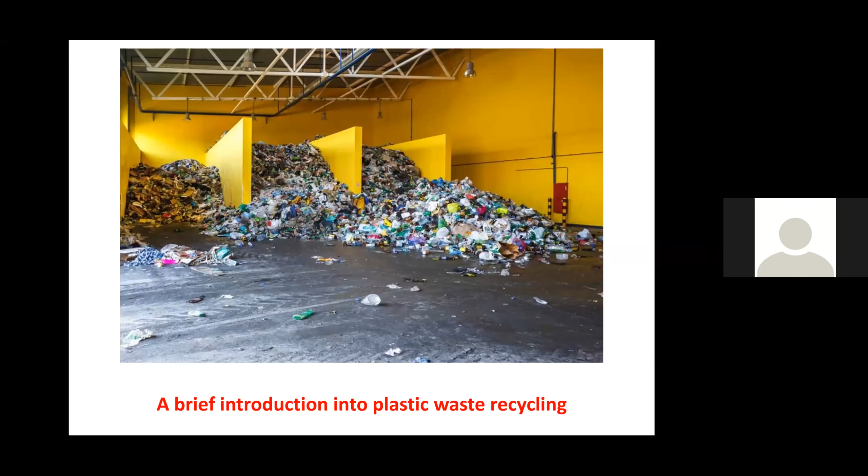Anyway, what I'm doing here first is a brief introduction into plastic waste recycling. But anyway, let's just get right into it.

Looking at the fate of all plastics from the 1950s onwards, the take-home message is that only around 9% of the global plastic waste was recycled. 12% was incinerated and nearly 80% accumulated in landfills or the natural environment. So there is massive scope to increase recycling.

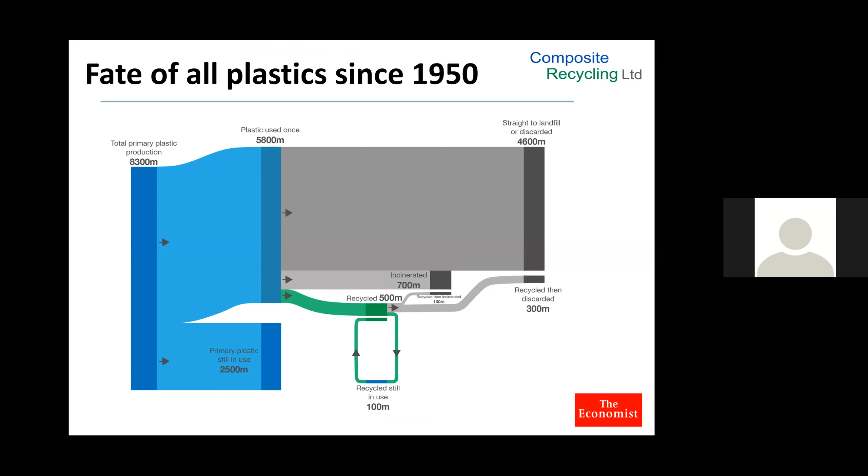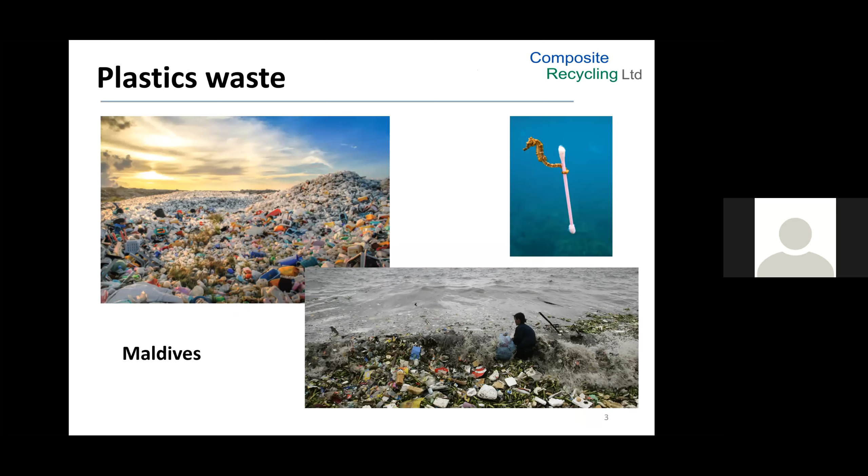Pictures just as these or worse of plastic pollution you may have seen, and you may have also heard of plastic pollution, which is also not good for anybody. So we do need to come up with solutions.

Very often Europe presents itself as a leader in recycling of plastics, but it depends a bit what you count as recycling. In 2014, for instance, export of plastic waste to Asia, mostly China, counted as recycling, although in practice this was often not the case. This Chinese recycling route was suddenly closed in December 2017 when China banned the import of plastic waste.

Moreover, we cannot legally export these wastes anymore. In May 2019, the EU, with most other countries in the world, the US being a notable exception to that rule, signed a treaty which classifies plastic waste as hazardous. Now, this greatly reduces the legal export of plastic waste to other countries and hence requires treatment at home.

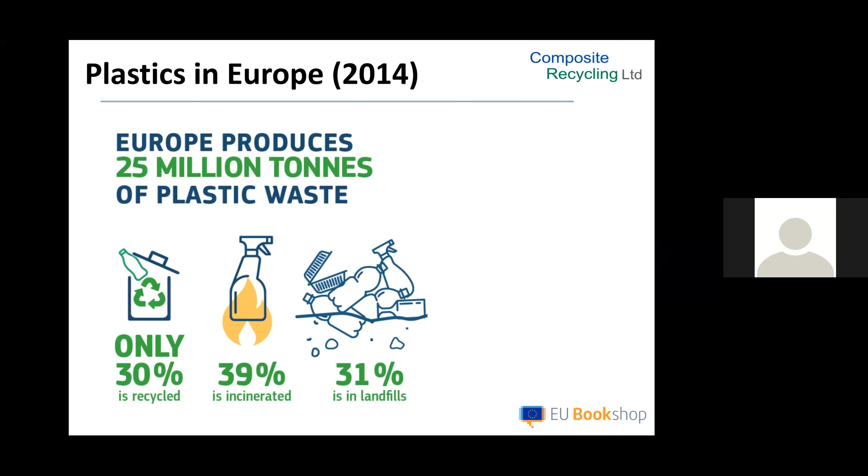And the receiving states have also realized that they don't actually want this waste either, as these plastics are often not recyclable, being contaminated with other wastes. For instance, in 2019, Malaysia sent back a number of waste containers. And this, as shown on this slide, is just one example.

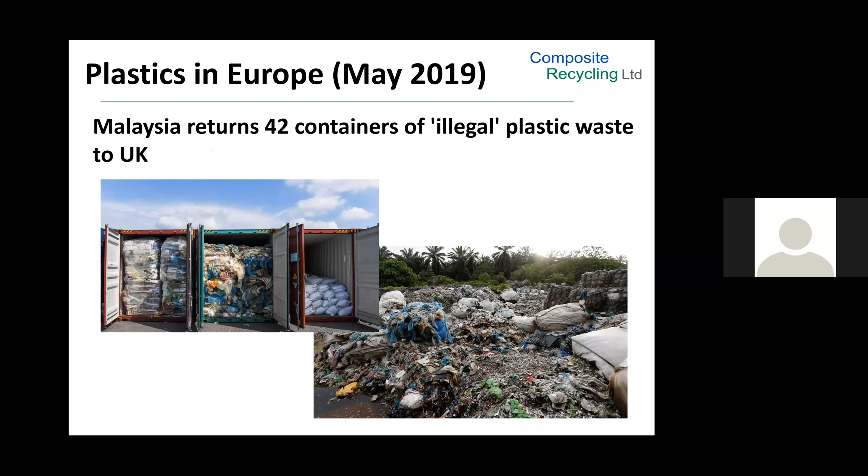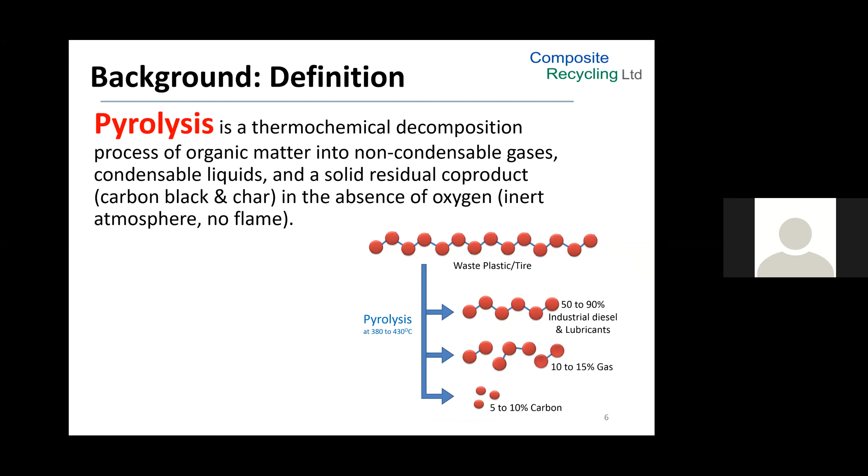So what can we do with plastic waste if we don't want to landfill it? Incineration is always an option. At least it gets the heat back. Another option is to pyrolyze the plastic waste and turn it back into oil. At a temperature of 450 degrees Celsius, polypropylene, for instance, converts into waxes, a small amount of oil, gases such as methane, propane, etc., and carbon, as shown here.

The chemistry of plastic pyrolysis is well established. There are thousands of papers stating more or less the same. There are quite a number of plastics and they all behave differently when pyrolyzed. Again, taking polypropylene, PP, the chemistry is not as random as one might think. The temperature has a major influence, controlling the amount of waxes, oil and gases as shown in the table here.

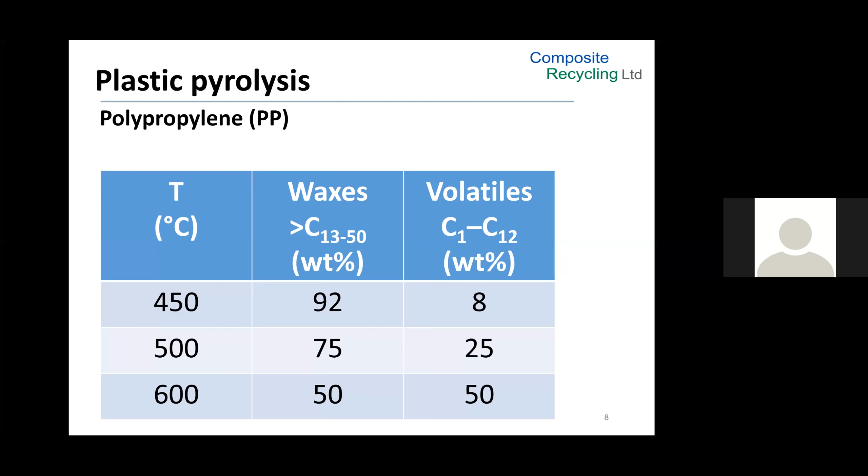In general, the higher the pyrolysis temperature, the lower the amount of waxes or oil, and the higher the amount of gases such as methane, propane, etc. I need to introduce two more terms. They are direct and indirect heating.

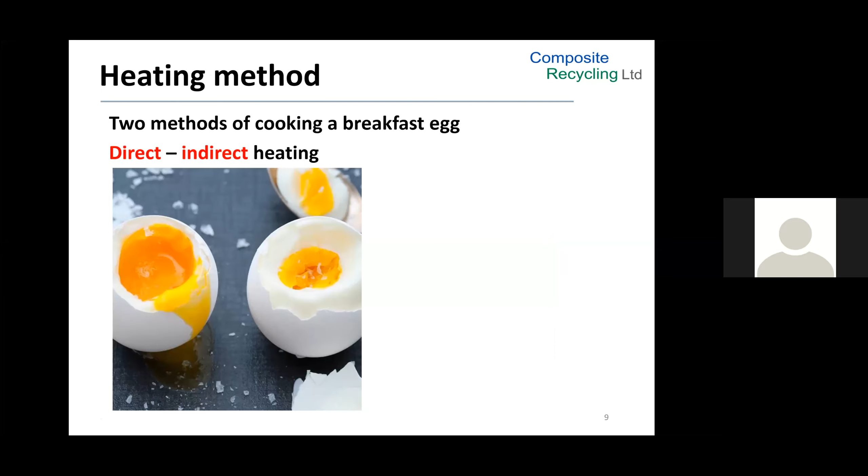There are two methods of cooking a breakfast egg. Method one, shown here, is what we all do. This is called direct heat transfer. That is, the material is in intimate contact with the heat transfer medium. In this case, it's boiling water.

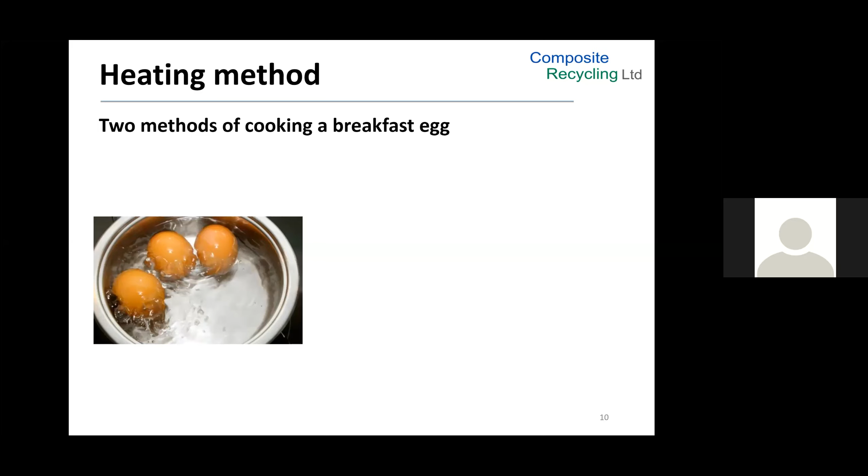Method two is virtually what everybody does in pyrolysis. This method places the egg onto a hot plate and waits for it to cook. This is called indirect heat transfer. Of course, you can improve things by turning the egg.

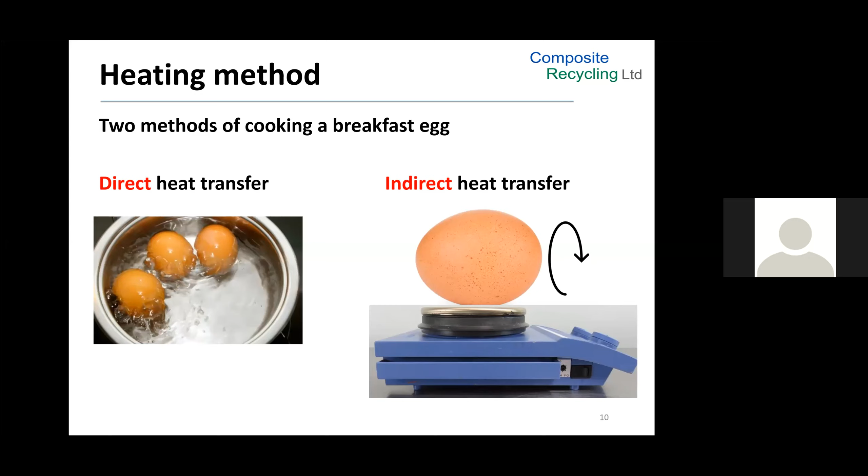Another word for such a process is rotary kiln reactor. Such reactors heat from the sides and the heat has difficulty getting in. The result is long residence times, temperature variations within the kiln, and secondary reactions such as cracking. So quite a number of things work against you when recycling plastic wastes in rotary kilns.

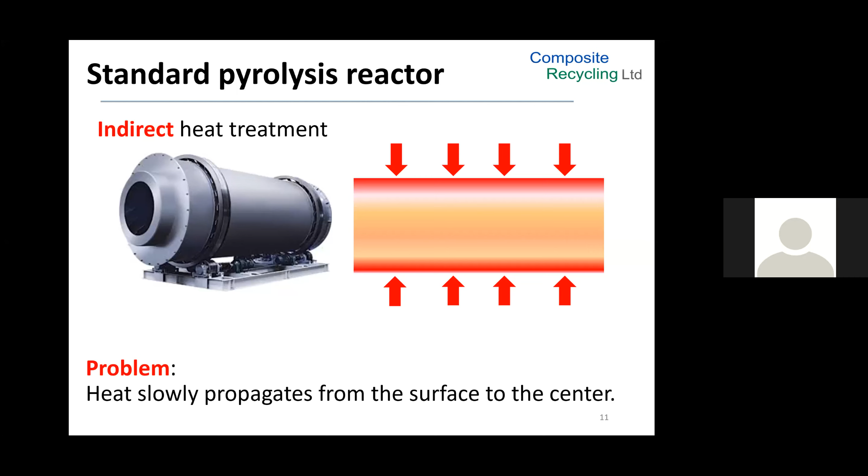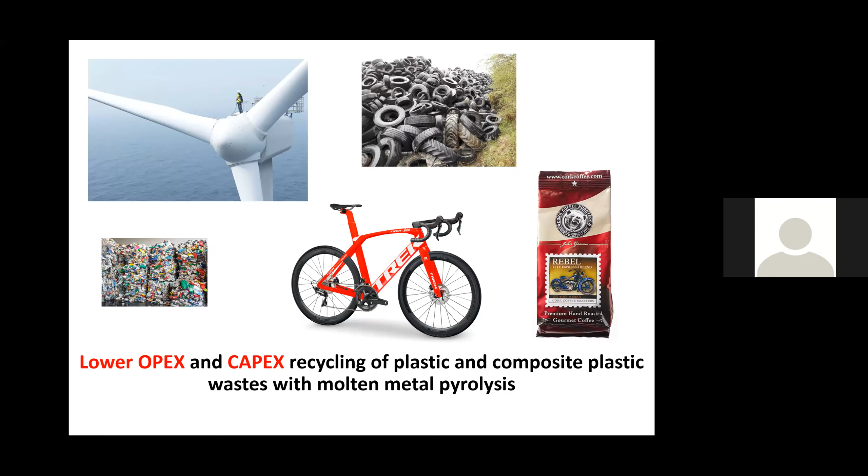All right, now moving quickly on to my company. In an earlier talk, I have already explained how we recycle tires, but we can do more. Here, I am going to show you how we recycle plastic wastes, especially mixed plastic wastes, and aluminium laminated plastics.

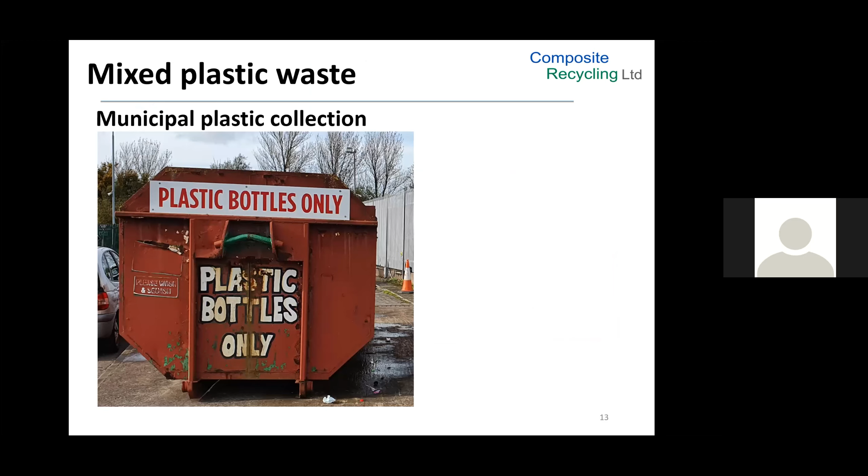Mixed plastic waste is a composite waste, and is therefore difficult to recycle. Mixed plastic waste is a composite waste as different plastics are mixed.

Ideally, this plastic stream should be remelted and reused. But there is a problem. Never mind that plastics can only be remelted 4 or 5 times, as every time remelting occurs, the plastic chain molecules get shorter. You can't remelt mixed plastic waste as the melting temperature of each plastic is different. But you could pyrolyze the whole lot.

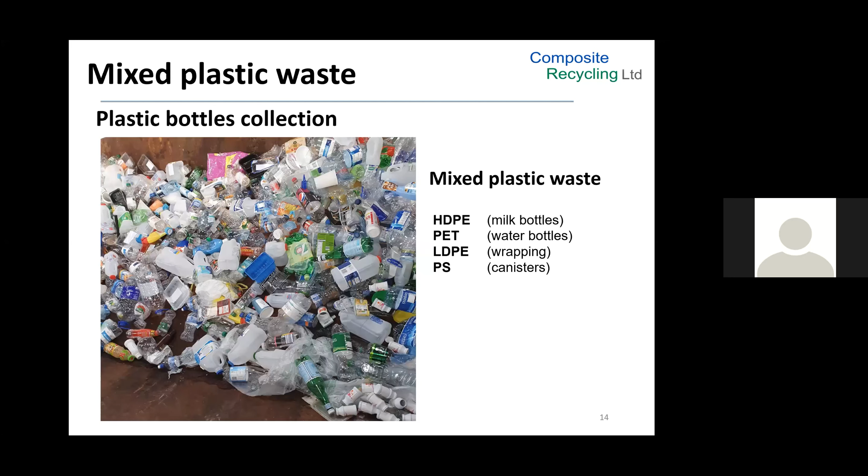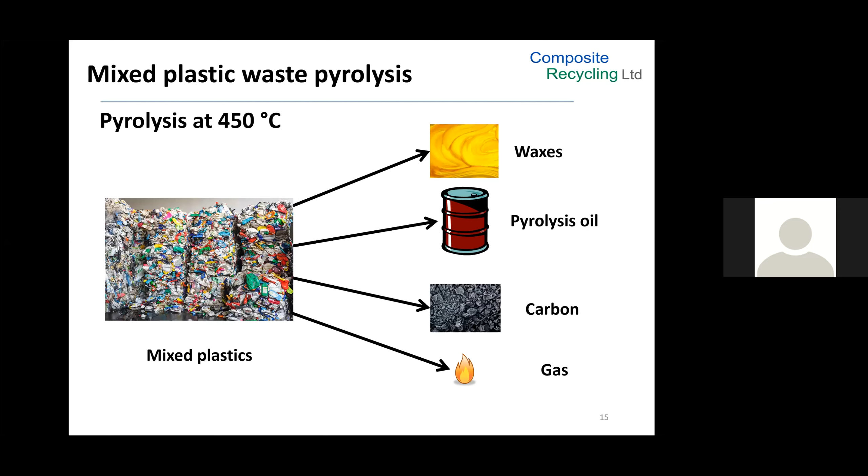Pyrolyzing mixed plastic waste results in different products. Nearly all of the polyethylene converts into waxes, while other plastics will convert to oil, waxes, gases, and carbon. But anyway, how would we do this in practice?

The waste plastics are added via an auger, for instance, to the pyrolysis chamber or onto the top of the molten metal where the material pyrolyzes. The vapors together with the solids are removed from the surface of the molten metal. The solids are separated and the gases are condensed to waxes and/or oil.

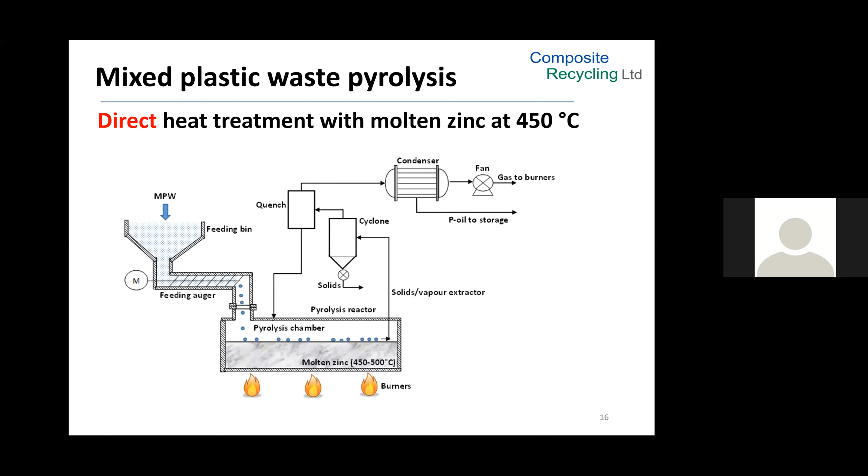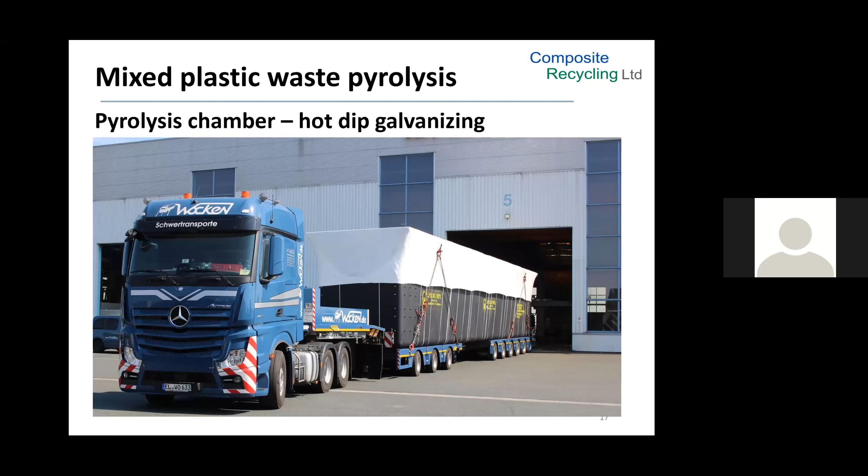The pyrolysis chamber itself is from the hot dip galvanizing industry and can indeed be very large as shown in this picture here. But this is where I want to get to.

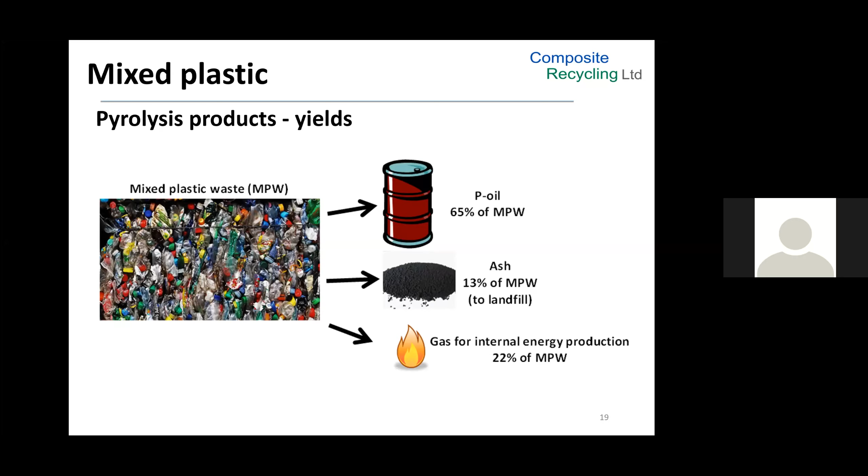These here are the yield assumptions. The pyrolysis oil yield was set as 65%, which is quite low. We could have set it at nearly 80%. And we know that our process has an extremely good performance in yield.

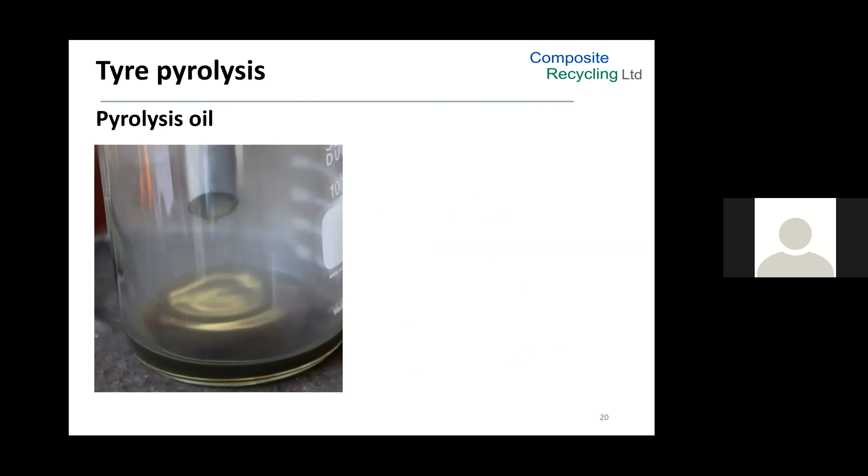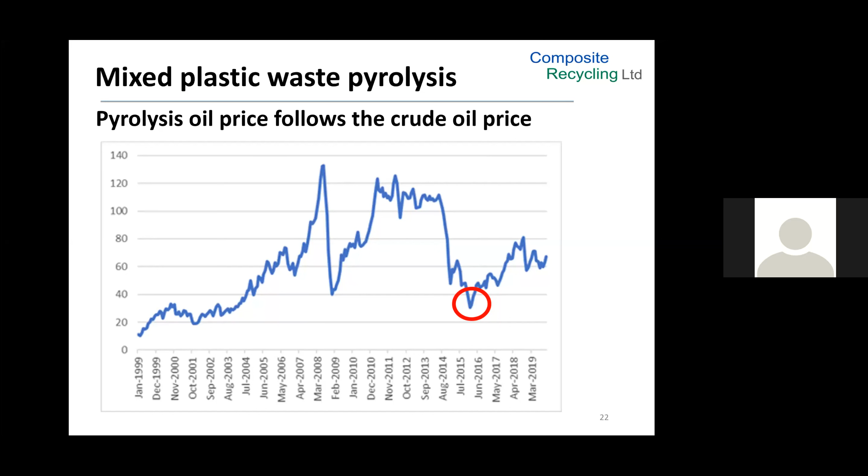We simply took the figure from February 2016 when the oil price was extremely low. That gave us a pyrolysis oil price of 210 euros a ton. This would be the revenue a plastic waste pyrolysis operator will achieve selling it to an oil refinery. This cost already includes the transport cost of getting it to the oil refinery. Waxes may actually achieve a higher price, but again, we just ignore this.

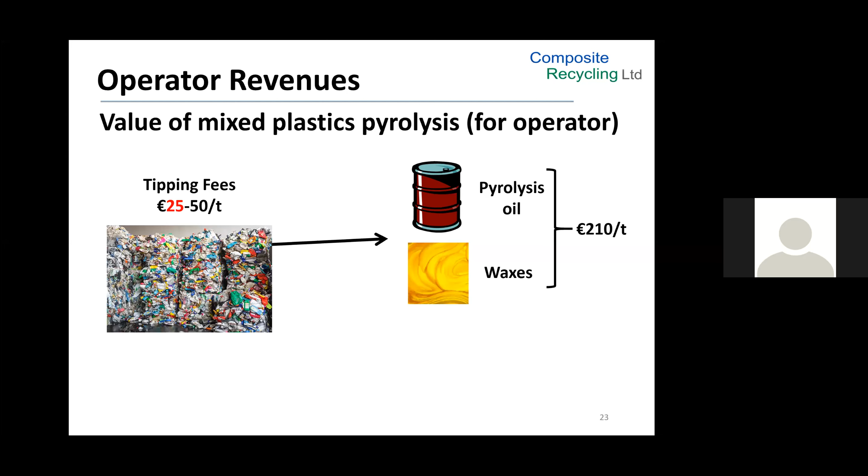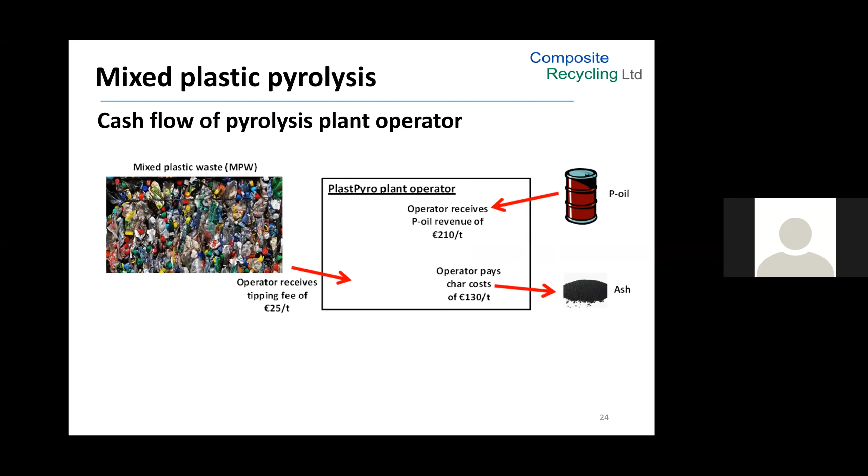There are also other costs, such as the building of the plant, insurance, personnel costs, electricity, and so forth. So you would have to estimate all that. Taking the cost of the facility as 26 million euros, allowing for finance cost, inflation, and operating costs of some 800,000 euros per year, the internal rate of return, or IRR, calculates to 21%. This is a very good figure, considering that incinerators have been built with returns of less than 7%.

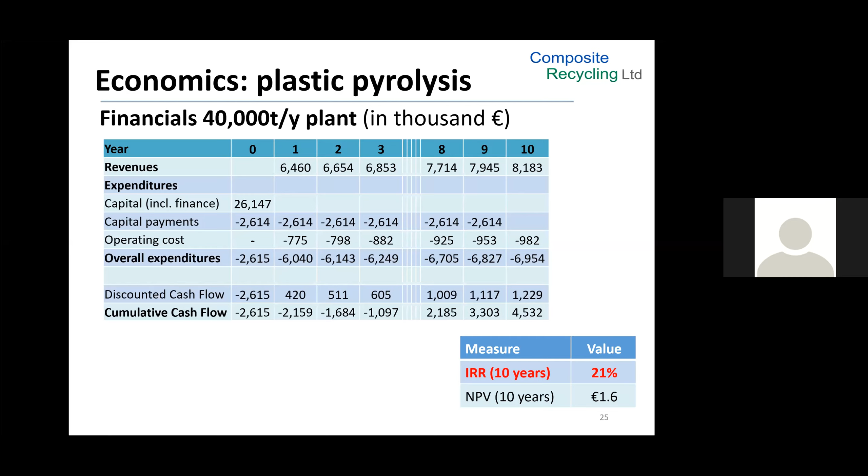The throughput of 40,000 tons a year sounds high, but actually it is not at all. In fact, in the US, for example, a competitor recently announced a planned 120,000 ton a year plastic pyrolysis plant. The financial returns, or the IRR, are sensitive to a number of factors. For instance, increasing the throughput of the plant to 50,000 tons a year increases the IRR to nearly 60%.

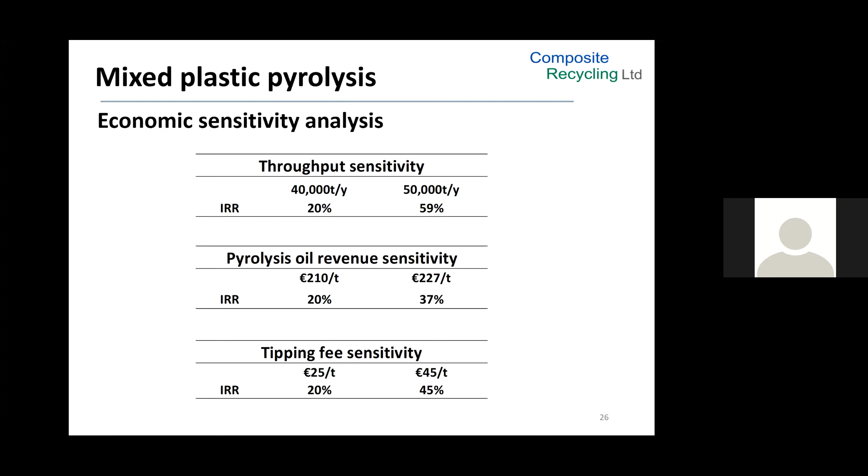Or getting an increased revenue for the oil increases the IRR also dramatically. Likewise, increasing the tipping fee from 25 euros to a more realistic 45 or 50, which is probably even better, increases the IRR to 45%. Now, on a worldwide basis, we believe that some 100 plants are needed. In other words, this is a very large market.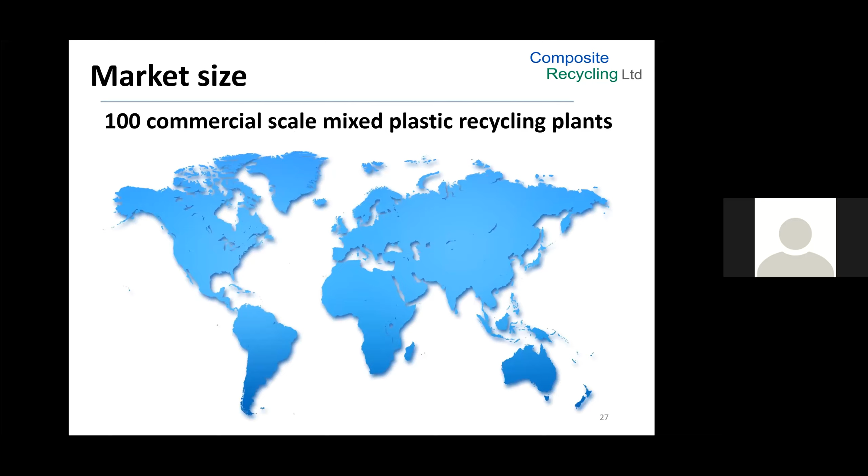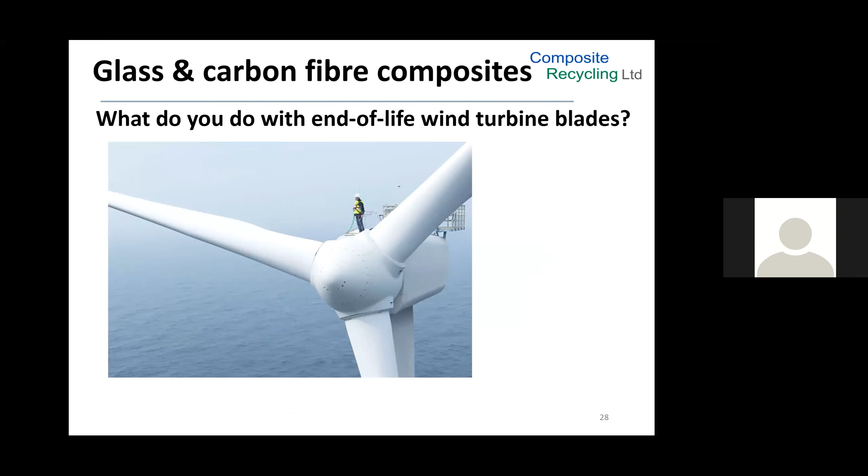Moving on to a more classic composite waste. Here, glass fiber wind turbine blades. These things, for instance, are not recycled. This is what happens to them. They are landfilled. Now, is this good or bad? Well, I don't really know.

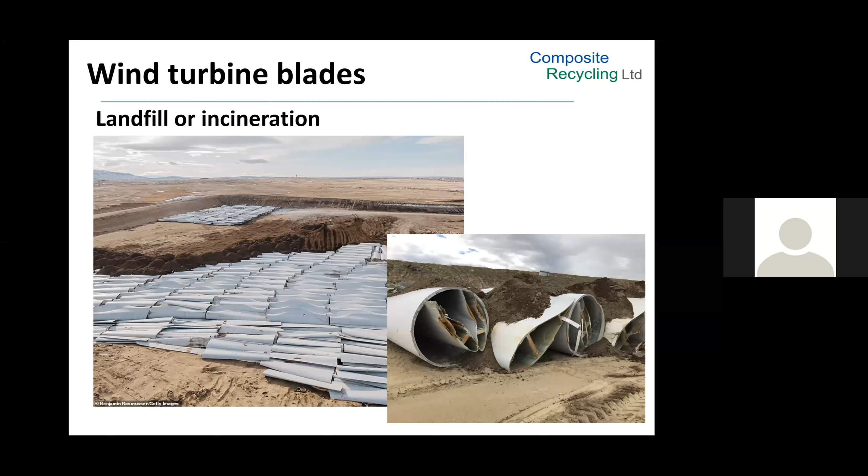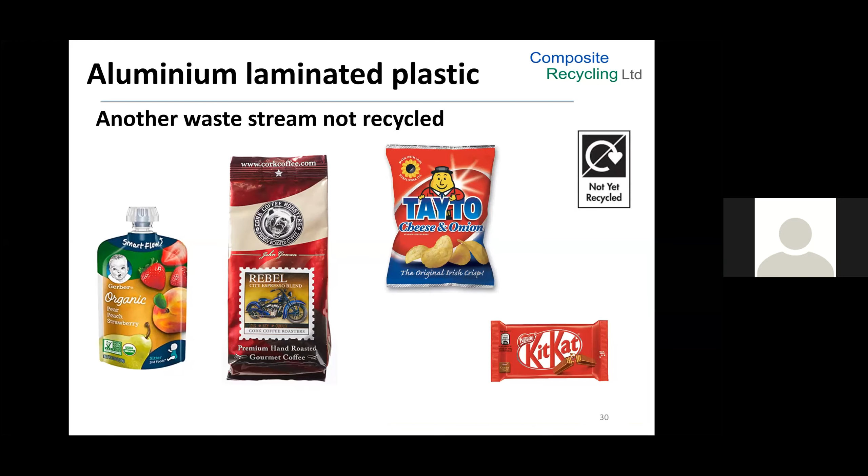This here is another waste stream that is not recycled. Aluminium laminated plastics, often used for coffee packaging and other foodstuffs, as shown here. Aluminium laminated plastic is an aluminium foil coated with plastic, typically polyethylene, on both sides. This is an excellent material for foodstuffs, but difficult to recycle.

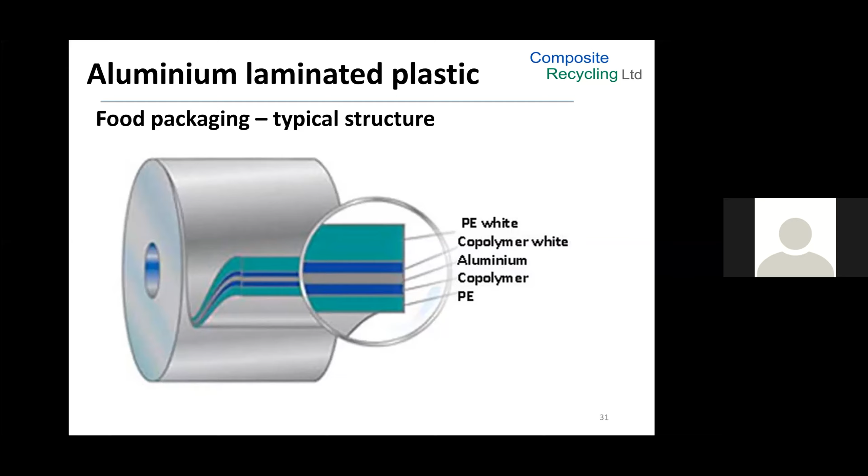It is possible to use hydrometallurgical methods, that would be acid or caustic, to dissolve the aluminium and somehow afterwards get it back. But clearly this is a very expensive solution. Pyrolysis appears to be a better solution. The following will happen at 450 degrees Celsius. Nearly all the polyethylene converts into waxes. Little oil, some gases and carbon, and then of course aluminium.

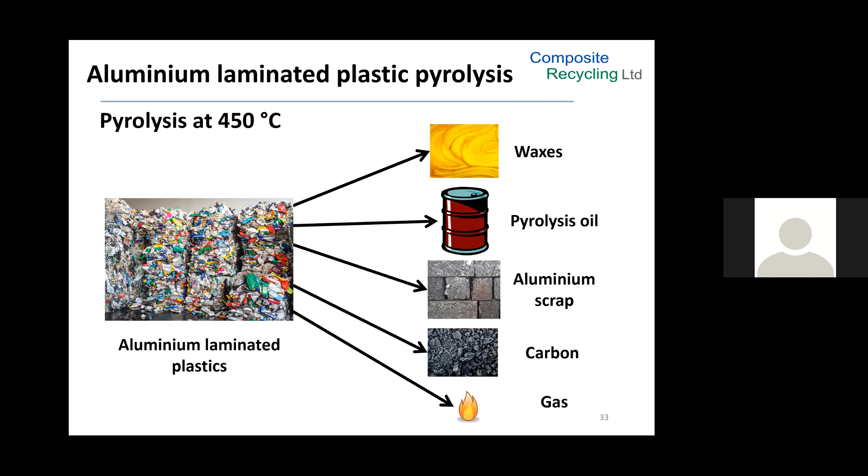For pyrolysis, there are three options. Microwave pyrolysis is offered by a number of startup companies. Well, to me, that sounds rather like an expensive way of recycling a waste stream, using high tech to treat a low cost waste stream.

Option B then would be the rotary kiln. Pyral, for instance, operates a pyrolysis plant, a rotary kiln in Germany. So therefore, this waste can be loaded into a kiln, processed and unloaded from it.

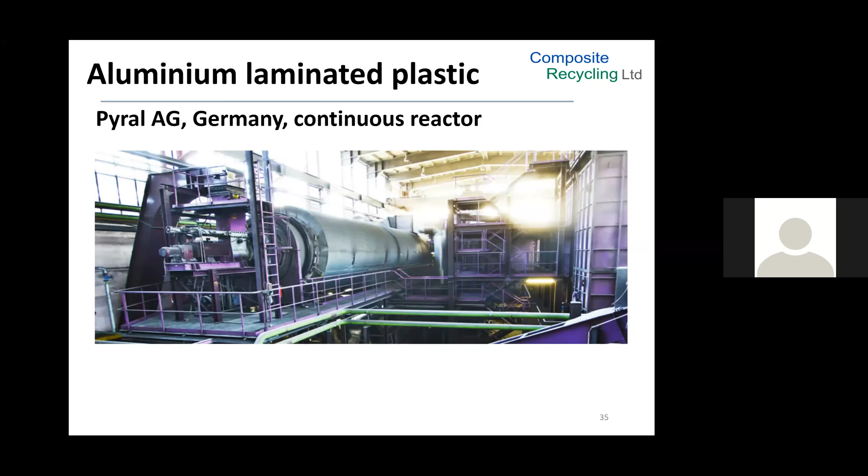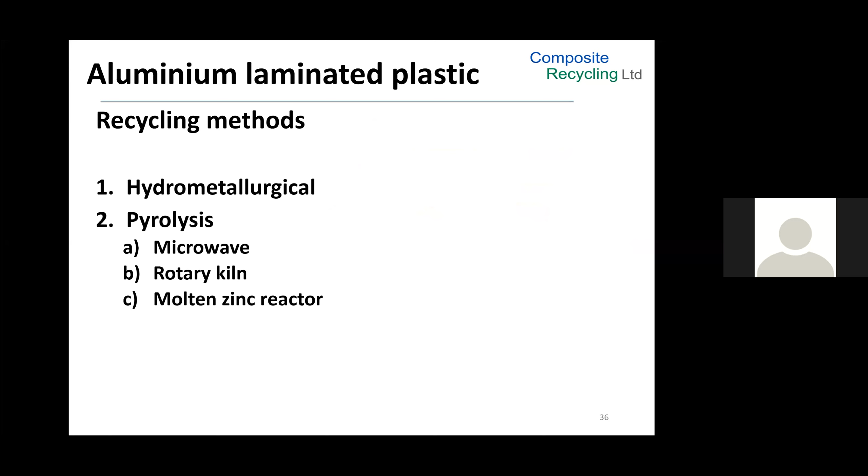This waste stream could also be treated in our molten zinc reactor rather than with a rotary kiln. But there is a problem. The economics of aluminium laminate recycling do not work out. And the technology used for recycling the waste is irrelevant for this problem statement. The problem is that economies of scale are not available. You simply cannot get enough aluminium laminate plastics into one spot.

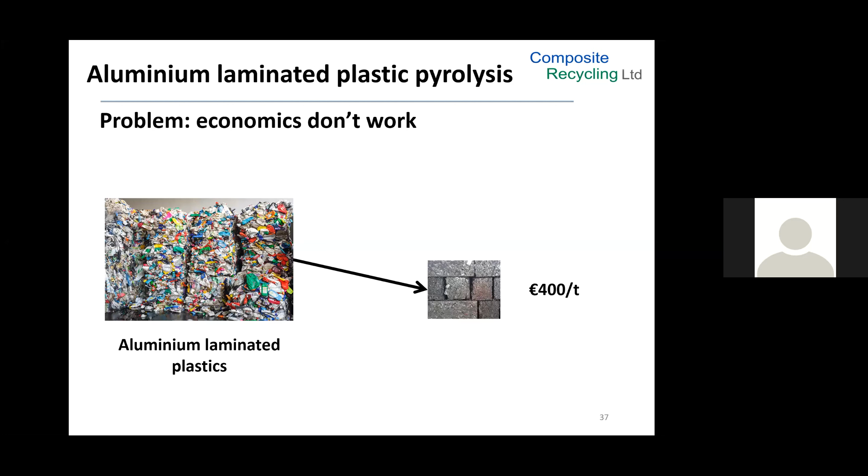Luckily, there is help at hand. To make the economics work, the tipping fee has to be increased. This is what's called extended user responsibility. In essence, the producer of the product pays the recycler a fee to recycle these goods. From a waste recycler point of view, this may actually be a good thing, as this fee is not subject to market fluctuations like the oil price is, and therefore it is a steady source of income.

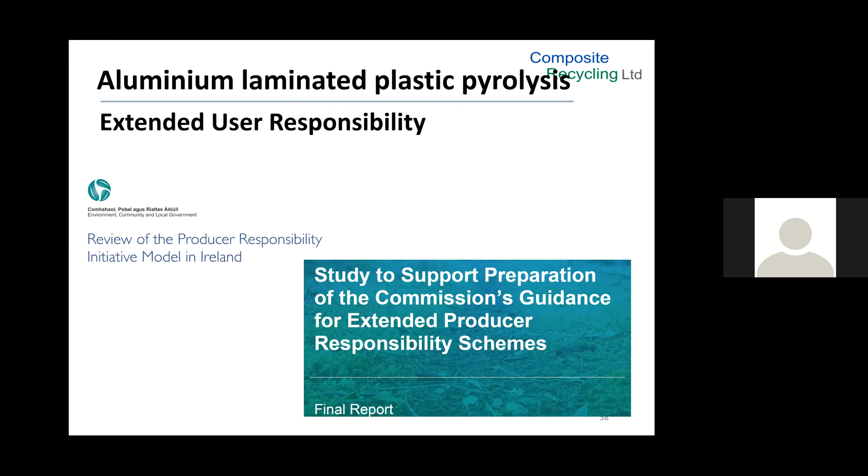Now, the Irish case is interesting and very tricky at the same time. Ireland's population is small compared to other states, and as a result, the waste volumes are low, making economies of scale even more difficult. Moreover, shipping costs across seas may be prohibitive. So, in nearly every case, extended user responsibility may have to come into play.

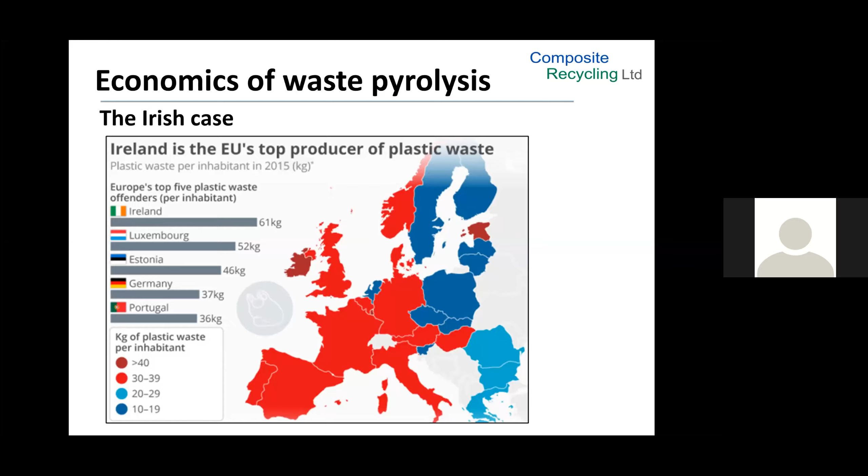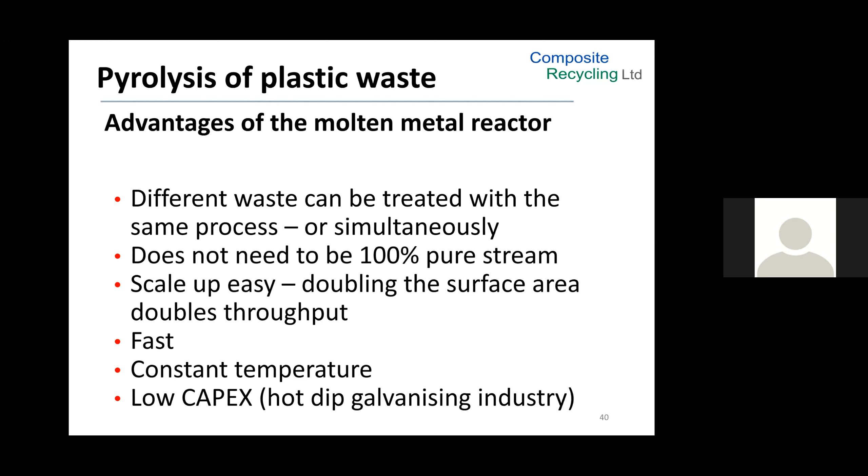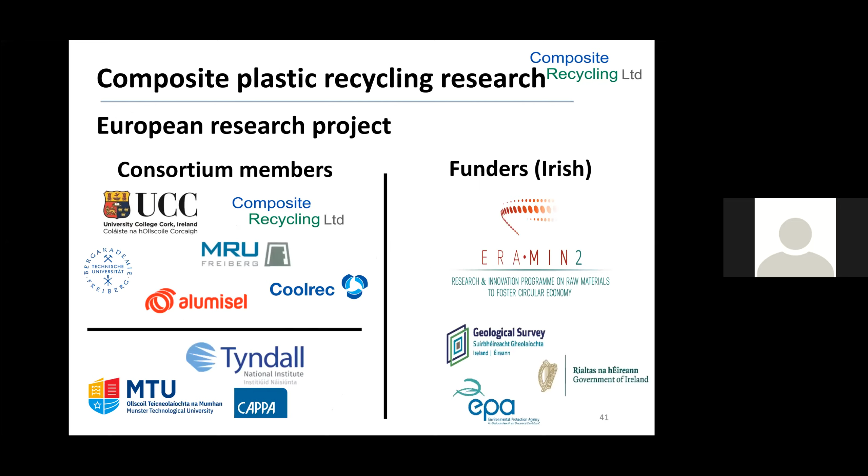Currently, we are part of a European research project into the recycling of composite wastes. These research projects tend to be large with many members and subcontractors as shown here. Over the next couple of months, we will be announcing new ways of how to recycle many composite plastics, such as the ones listed here. So, well, stay tuned, so to speak.

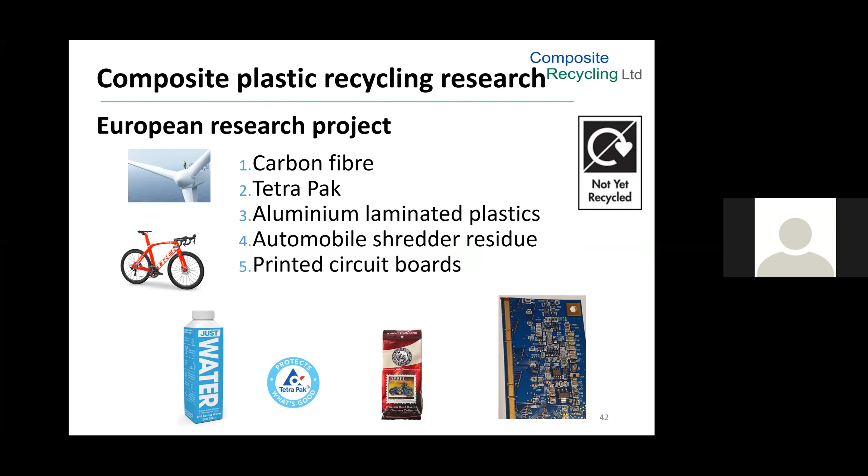The next step in the development of the technology is the demonstrator scale, just prior to commercialization. So yes, we are looking for funding.

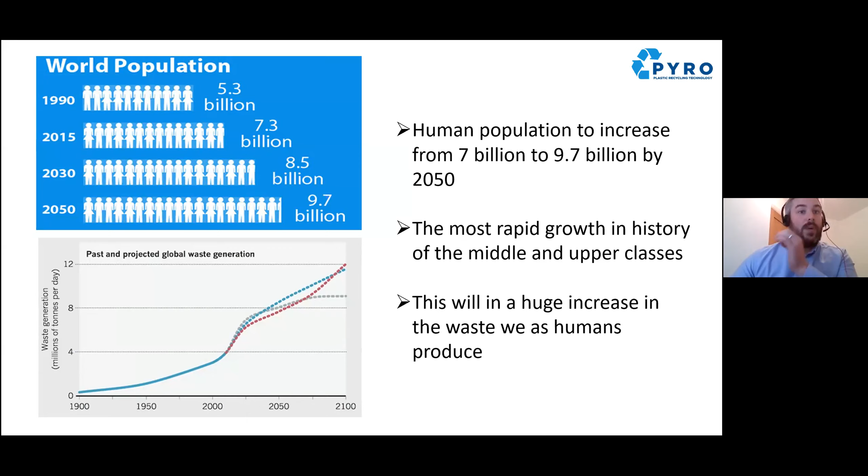It is not commonly known that waste is a huge contributor to global warming, with 1 ton of rubbish emitting 6.2 tons of carbon dioxide equivalent in the form of methane to the atmosphere. With the huge increase in demand for resources and the harmful effects of waste we as humans produce, it is now more important than ever for us to move away from our current consumption model of take, make, and dispose to a circular economy where we will continue to reuse resources by recycling.

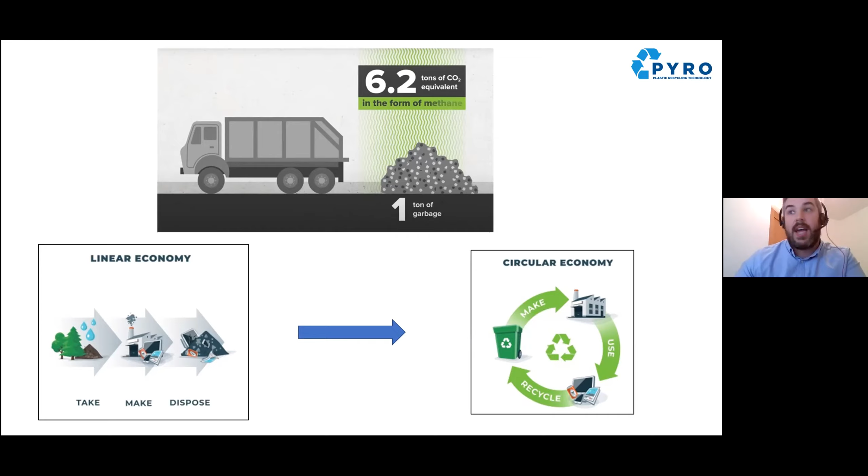This problem of what to do with all this waste has led many people to ask simply why we do not just burn or incinerate our waste and use it to produce electricity. Although this may seem like a simple solution and reduce the fossil fuel consumption for energy production, it has serious long-term effects as it produces numerous harmful emissions and a very toxic ash, and unfortunately is extremely energy inefficient. So what is the solution? Pyrolysis, or chemical recycling, as it is sometimes referred to. Unlike incineration, there are no harmful or toxic ashes, and also there are no harmful emissions like dioxins or furans.

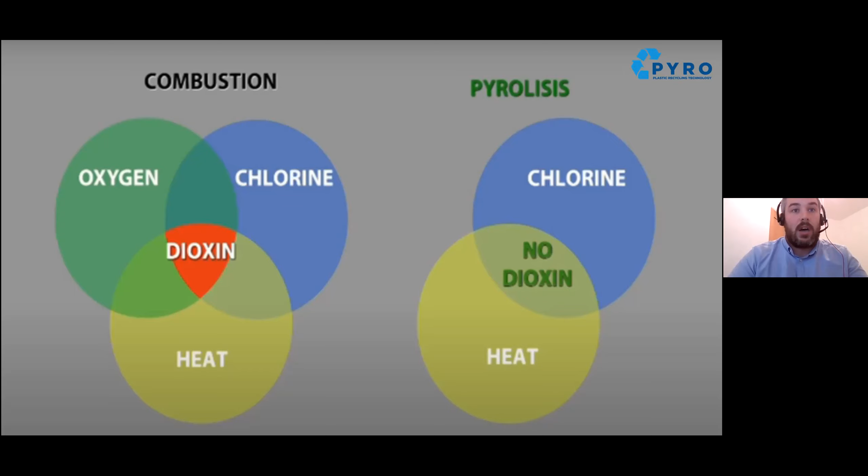This is for the simple reason, as Frank explained, pyrolysis, unlike combustion or incineration, there is no oxygen present, and, as the name implies, dioxins contain oxygen molecules. As a general rule, oxygen-containing emissions are the most harmful to human health because we as humans absorb oxygen through our blood to breathe.

A point I have to make tonight is that, as many of you may have heard over the Christmas period, two peat-powered electricity generation stations have closed at Shannonbridge in Offaly and Lanesborough in County Longford. These two relatively new power plants, costing in the region of €250 million each, are a huge waste of taxpayers' money, and more importantly, will destroy their rural communities.

Although we think of peat as being a very Irish resource, this is not the case, and it is very common in Scandinavian countries. These Scandinavian countries, who also had to reduce the burning of peat to meet their carbon emissions, instead of taking the easy way out and just shutting them down, decided to turn to the technologies of gasification and pyrolysis, installing these plants next to their old peat-powered stations, which convert waste into a clean gas that fueled their power plant, thus stopping the closure of the plant, saving jobs and taxpayers' money, and more importantly, stopping the burning of peat and coal and reducing their CO2 emissions.

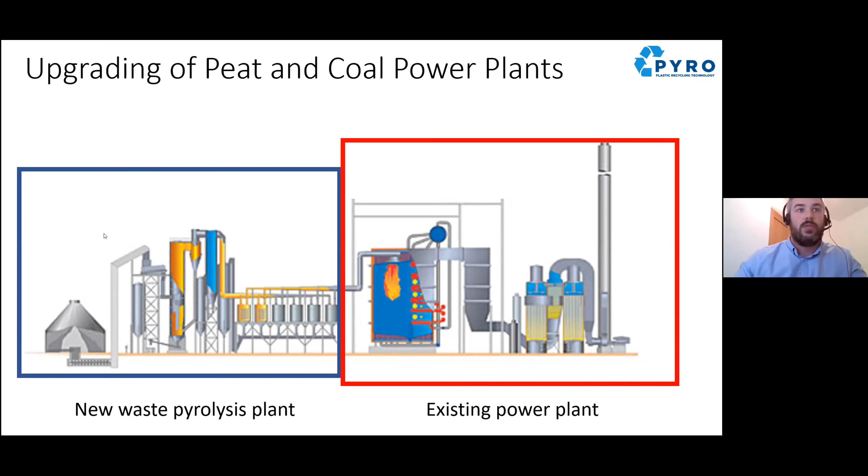As we can see here, sorry, apologies. Here is a picture of the power plant. As we can see, the new waste to gas plant tying into the existing power plant.

Converting waste into energy using pyrolysis, although an extremely useful technology, can be put to far greater use other than producing electricity. It can be used to create highly valuable oils, chemicals, and other fuels, which has the ability to solve some of the main blind spots highlighted by the international energy agencies, which are petrochemicals, long-haul trucks and lorries, and the manufacture of materials like steel and plastic.

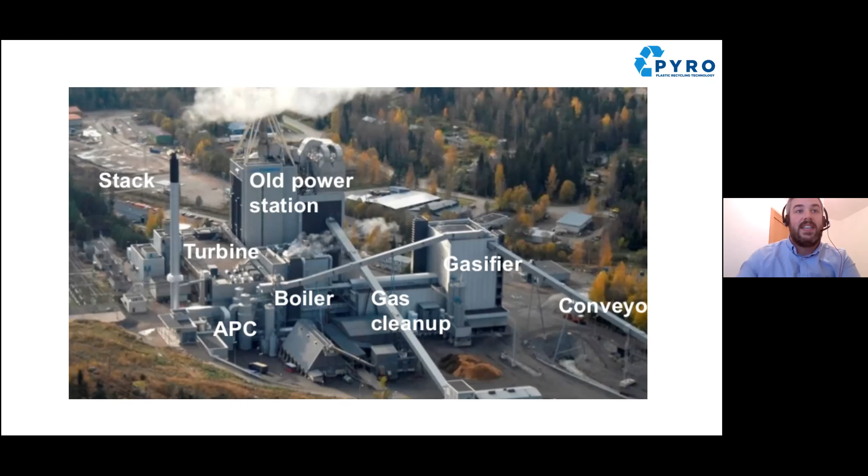Of all the materials that we can process by pyrolysis, plastic is by far the most lucrative and readily available, and as we are all well aware, is the most pressing environmental issue of our generation. The biggest growth of any type of human waste by type will be plastic. By 2050, plastic production is set to quadruple, and there will be more plastic in our oceans than fish.

I will draw your attention to the plastic share of global oil consumption, which will be increasing from 6% to 20%, and its share of the carbon budget will increase from 1 to 15%. We will later discuss how pyrolysis can drastically reduce both of these.

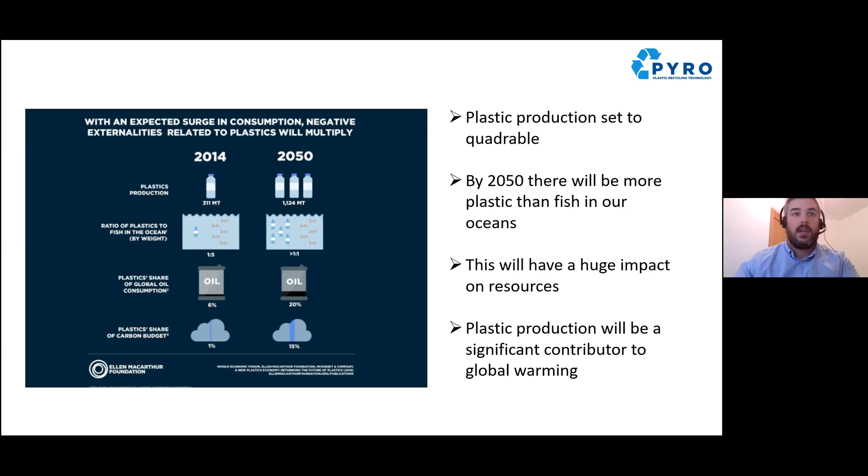I'm not going to go into detail in this lecture about the current plastic crisis, as it has been well publicized, and I want to spend the rest of this presentation discussing the only, and I mean the only, solution to the plastic waste crisis, which is the pyrolysis of plastic waste, or chemical recycling, as it is sometimes referred to. I am calling this a plastic waste crisis because we do not have a plastic crisis, we have a plastic waste crisis.

The reason I say this is because plastic is one of the most critical materials in the fight against climate change. It reduces food waste, reduces the weight of cars and planes, thus reducing fuel consumption and making electric vehicles possible. Most materials, when compared to plastic, have a far higher CO2 equivalent when viewed over the life cycle of the product. This is because of how light plastic is per unit strength, thus requiring less of it and making it lighter to transport.

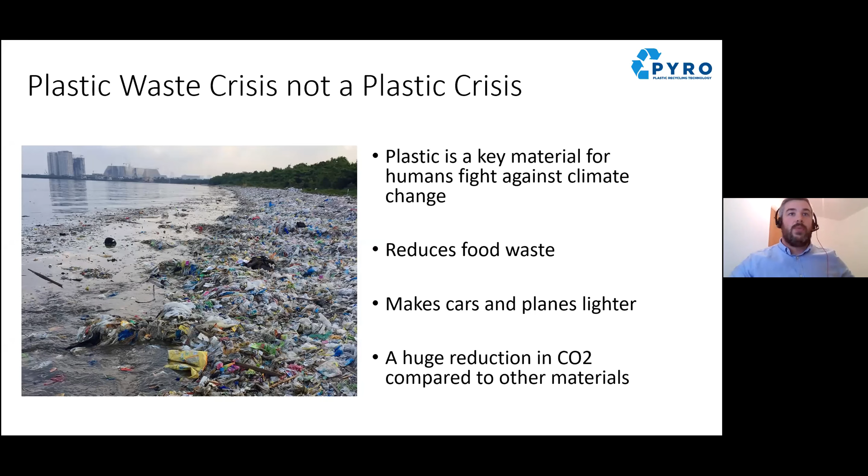The issue we have is that we have not found a way to recycle plastic efficiently, the same way we have other materials like glass and aluminium. The reason for this: although there are only 7 resin codes, there are actually thousands of different types of plastic. Different combinations of dyes and additives can be added to the basic resin to produce a desired color, shape, and texture in the final product. These variations in manufacturing process lead to different melting points and other properties within the same resin code.

So in order to mechanically recycle plastic, it has to be separated into the correct type, color, production method, and be relatively clean and of good quality. And this all has to be done while waste companies are trying to make a profit. Along with this, every time plastic is mechanically recycled, its quality degrades. This is the reason 80% of plastic that has been recycled once ends up in landfill or incineration.

In most communities, only bottles with necks marked with resin codes 1 or 2, which are soda bottles and milk jugs, are recycled. Containers without necks, such as tubs and trays, and plastic films, are not easily recyclable.

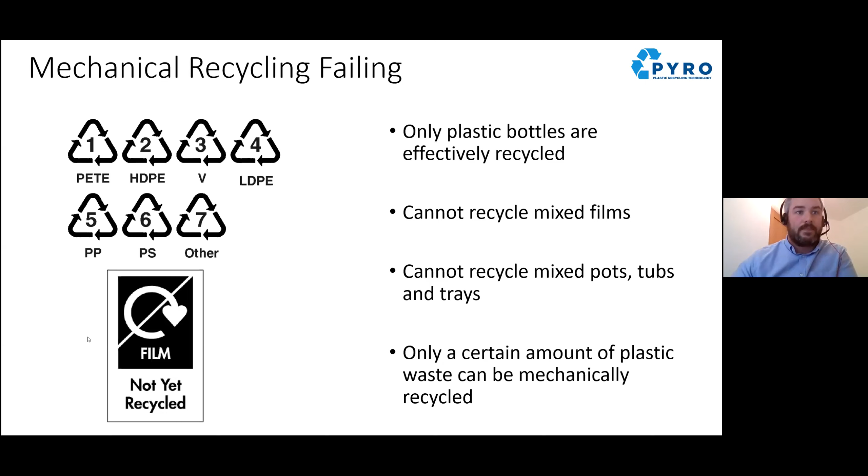So a way to recycle mixed type, mixed color, with additives, dirty and poor quality plastic, where it can be recycled infinitely without its quality degrading, and most importantly, making it profitable. The only technology that can do this is plastic pyrolysis.

I just also want to make the point that plastic pyrolysis will not take good quality plastic waste destined for mechanical recycling. As Frank said earlier, we will have to pay for this feedstock versus getting paid a gate fee by waste companies to accept this previously unrecycled plastic waste, as they are trying to avoid high landfill and incineration costs. A facility to recycle this unrecyclable plastic, like plastic films, is badly needed for waste companies who want to avoid the high costs associated with landfill and incineration.

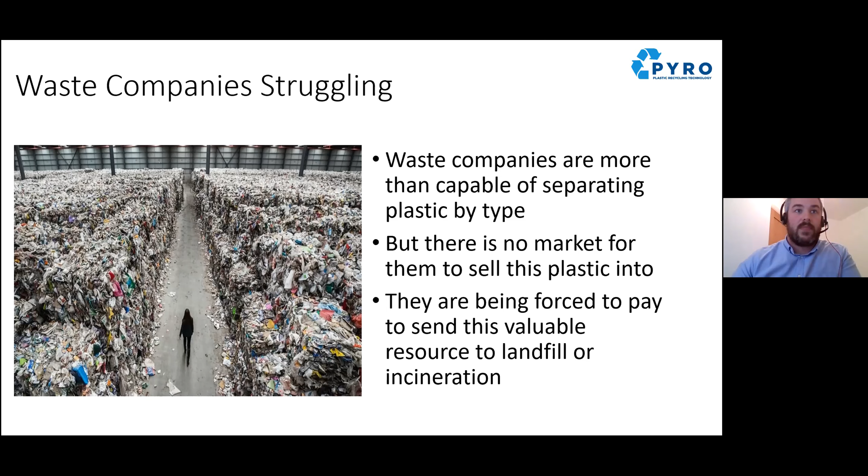A point I would like everyone to leave with today is that biodegradable plastics are not the answer to the plastic crisis, and in fact are making the crisis worse. If anything, we should be reducing the types of plastic that we use. As I said earlier, if you throw biodegradable plastic into your general waste bin and it ends up in the landfill or into the environment or in the ocean, it will behave the exact same as any other type of plastic and will take just as long to degrade.

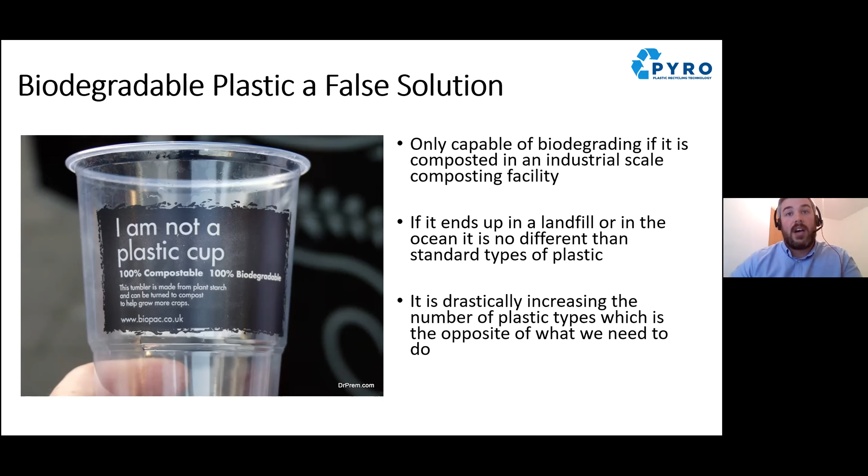Only industrial composting facilities, not your compost bin at home, can degrade this plastic as high temperatures are needed. What is worse is that very few of these industrial composting facilities accept large quantities of this plastic waste. If a biodegradable plastic ends up going to incineration, which is very possible, it will break back down into what it was formed by, which with bioplastics is often acids, which obviously is a very bad pollutant.

This accounted for 5% of the world's cropland being changed from food to biofuel production. This was a key factor that caused the world food supply to dip below world food demand in 2008, which resulted in food riots across the world and countless deaths due to malnutrition. This madness was thankfully reduced, but unfortunately, traders who are seeking higher profits are now eyeing up the bioplastics market to once again take food that should be used to feed people to produce these bioplastics.

This is causing rainforests to be cleared to make way for palm oil, to produce compostable plastics, to make us in the West not feel guilty about our disposable coffee lids. And with 1 billion people going to bed hungry tonight, this is, in my opinion, close to a crime against humanity.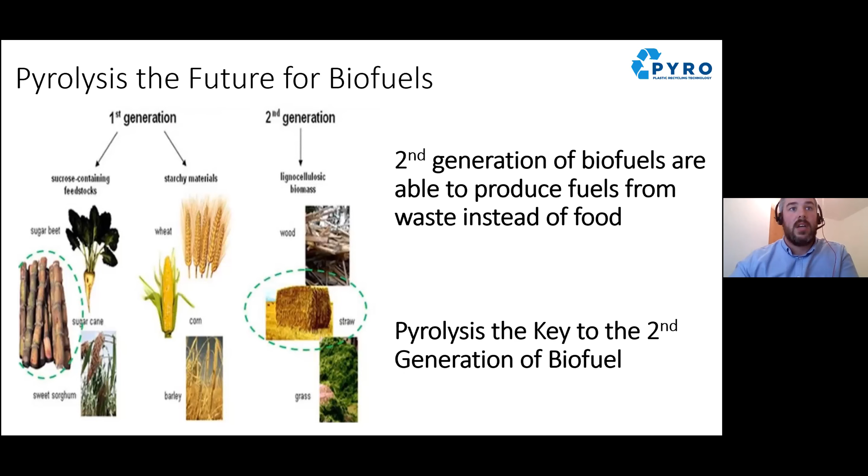Polyolefinic plastic, which is low-density polyethylene, polypropylene, and high-density polyethylene, accounts for 60 to 70% of the world's plastic, and more importantly, is the hardest plastic to recycle, used in the production of plastic films and pots, tubs, and trays. With this plastic, it is very possible to produce the highest quality chemicals and oils, which can be used to make virgin quality plastics by great companies like BASF.

The solution to the waste plastic crisis and to get recycling rates above 95% is to turn previously unrecycled plastics not back into plastics, but into its feedstock, oil. This oil can be used to produce virgin quality plastics. This will drastically reduce the CO2 footprint of plastic production.

Combined with this, the third generation of plastic pyrolysis plants, which hopefully our company will start designing in the next 3 years, will reduce carbon dioxide emissions by around 65% by converting plastic into its original monomers. I will not go into this today due to time constraints, but it is clear to see the potential that plastic pyrolysis has.

The development of this industry will give waste plastic a value similar to aluminium cans. This will create a natural industry for the collection of plastic in countries without developed waste infrastructures, and will give employment to the world's poorest and where it is most needed.

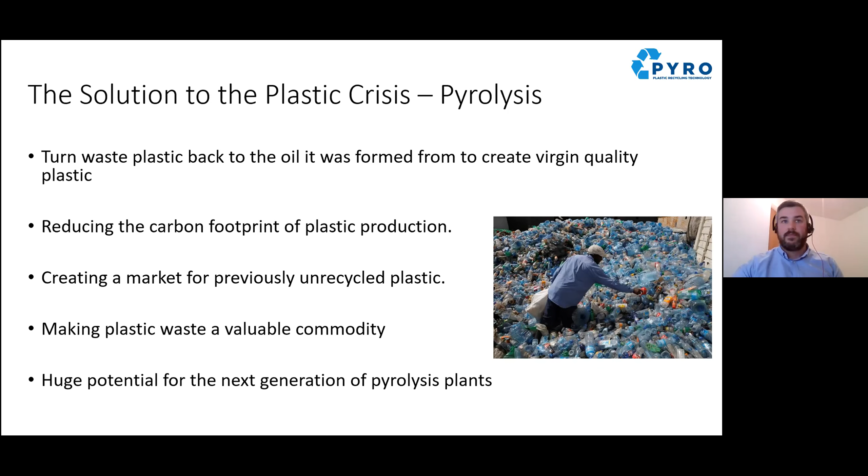The global outrage about the plastic waste crisis has driven consumer brands like Nestle, Pepsi, and Unilever, who are aiming for 100, 33, and 25% respectively of their materials to be produced from recycled content by 2025. Coca-Cola are aiming for 50% recycled content by 2030.

How, you might ask, are Nestle going to achieve 100% recycled content by 2025 while requiring food-grade quality plastic? You guessed it, by investing in their very own plastic pyrolysis plants. The EU has also doubled the plastic recycling rate from 22.5% to 50% by 2025. Countries like Ireland are going to find it hard to hit this target without investing in plastic pyrolysis plants.

In turn, this demand has placed huge pressure on petrochemical companies to produce plastic from oil derived from waste plastic, which has led to a €300 per tonne premium on pyrolysis oil over oils derived from fossil fuel sources. This is a phenomenal premium, which is creating a gold rush in the plastics pyrolysis industry.

This has led to companies setting up, buying old first-generation pyrolysis plants and technology, which has failed before. And when companies like ourselves and other second-generation pyrolysis plants come online, these unfortunately will fail again, as the law of supply and demand will once again decrease the value of this oil.

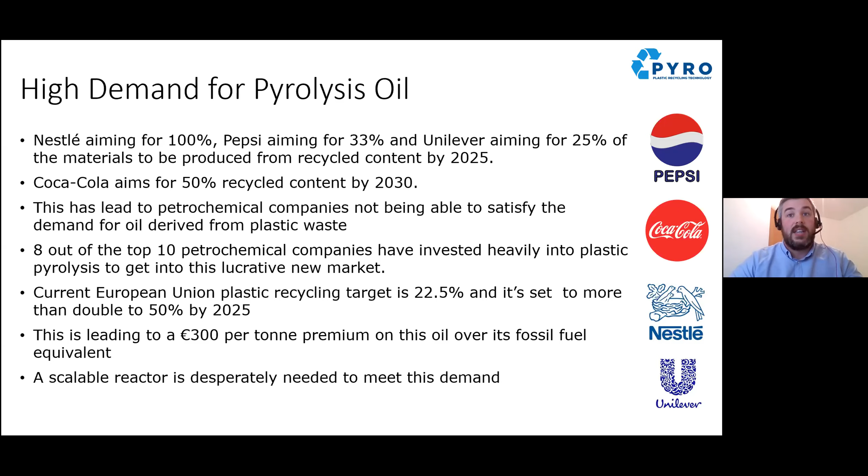So let me introduce my company, Pyro Plastic Recycling Technologies, whose mission statement is simple: to eliminate all plastic waste by the year 2040. Although people may laugh, this is an easily achievable target, by increasing our mechanical recycling rates and by investing in technologies like plastic pyrolysis, which we believe is the missing jigsaw piece to eliminate plastic waste.

So a bit of background on myself and how I became obsessed with plastic pyrolysis. My first project out of college was a plastic pyrolysis plant over 10 years ago. This gave me an early insight into the problems encountered with plastic recycling, and I was shown the simple process of heating plastic in the absence of oxygen to 400 degrees and cooling it back down to 10 degrees, and you will get a beautiful oil. I found this amazing and went on to make my own smaller plastic pyrolysis plant in my garage back home.

But the real thing that drove my obsession was being on site and coming to the realization that nearly as much fuel trucks were bringing fuel into the plant than were leaving the plant. I was shocked at this discovery, and when I tried to raise the issue, being a kind of young fellow out of college, I was told to shut up and just build the plant. But after doing some research, I found out that the biggest criticism of plastic pyrolysis is that it consumes more fuel than it produces.

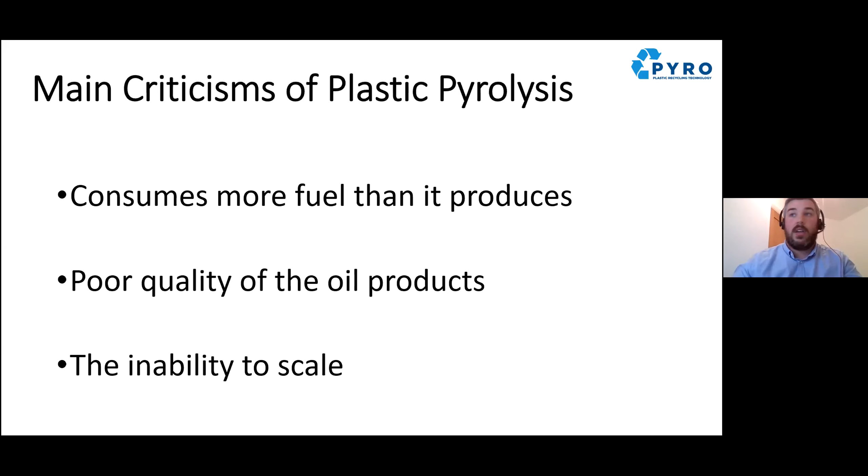All of these first generation plastic pyrolysis plants went on to fail because of poor technology, which was unable to cope with the fluctuating crude oil prices because of high operating and capital costs. This was a great start for a young engineer getting first-hand experience of the three main criticisms of pyrolysis. As I went on to work in other industries, I always kept plastic pyrolysis in mind when I saw how other industries dealt with these three main issues encountered by plastic pyrolysis.

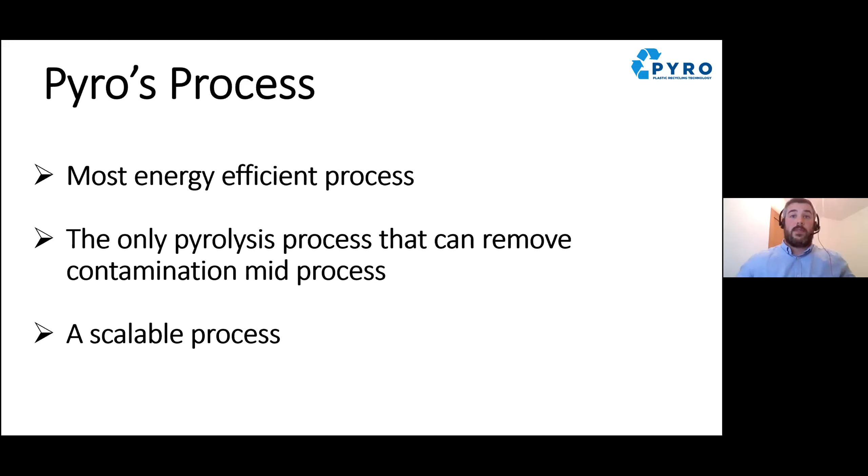In 2017, when China stopped importing the world's plastic waste, I left my job to provide consultancy to the new plastic pyrolysis companies that were setting up. When I saw how the industry had changed from paying €100 per ton for waste plastic feedstocks to receiving €200 per ton in a gate fee to accept this waste, and sitting across the table from oil companies who were offering huge premiums for pyrolysis oil when crude oil prices were at rock bottom, I decided it was perfect timing to bring my process to market.

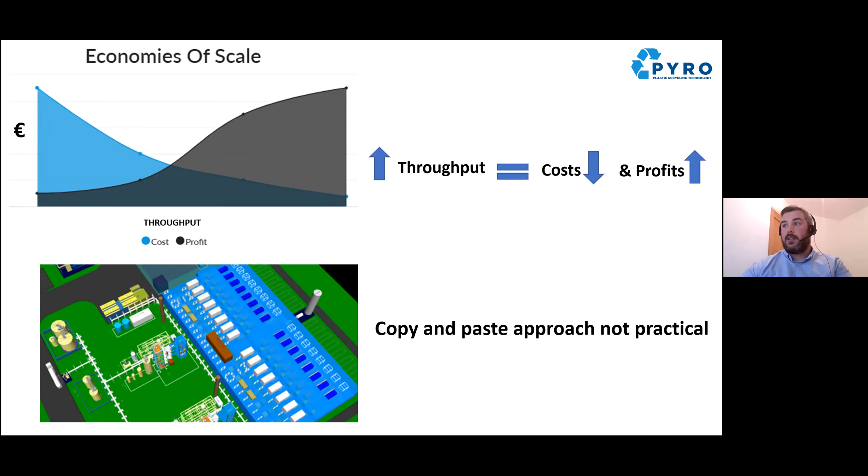Pyro decided to reimagine existing technologies from the oil and energy sectors that have been proven to work at huge scale and that have many huge benefits, which is why it is the technology of choice in the industry for cracking of long-chain hydrocarbons. This piece of technology is called a fluidized catalytic cracker. Unfortunately, the problem we at Pyro faced was that there have been many attempts to process plastic using this technology, which have failed. This is because plastic behaves completely differently to any other feedstocks that have been supplied to these crackers in the past. Pyro have found a way to manipulate this plastic in order for this reactor to process it. We believe that this breakthrough is the key to being able to process huge quantities of plastic waste and to solve the current plastic crisis.

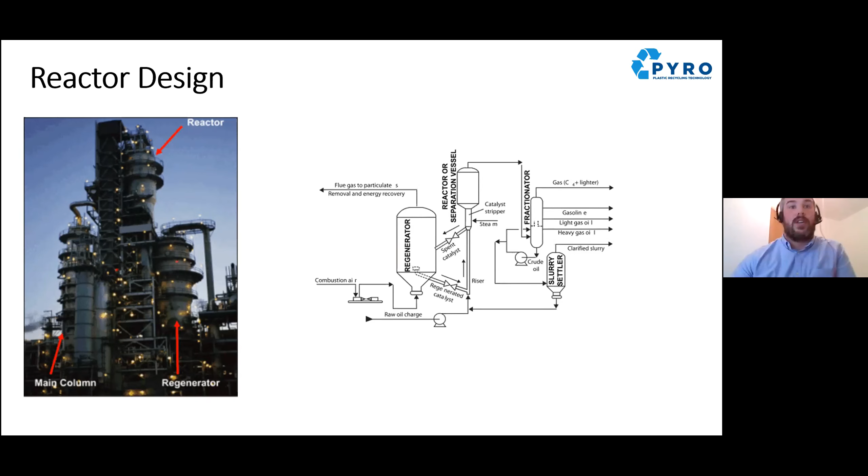What's next for our company? Pyro have taken the approach of partnering with multinational companies with manufacturing power and the economic might to roll out our technology on a large scale, enabling our process to have a huge impact on the global plastic crisis. Pyro have designed their first plant with this in mind, and as it is of modular design, we'll be able to copy it and ship this plant all over the world.

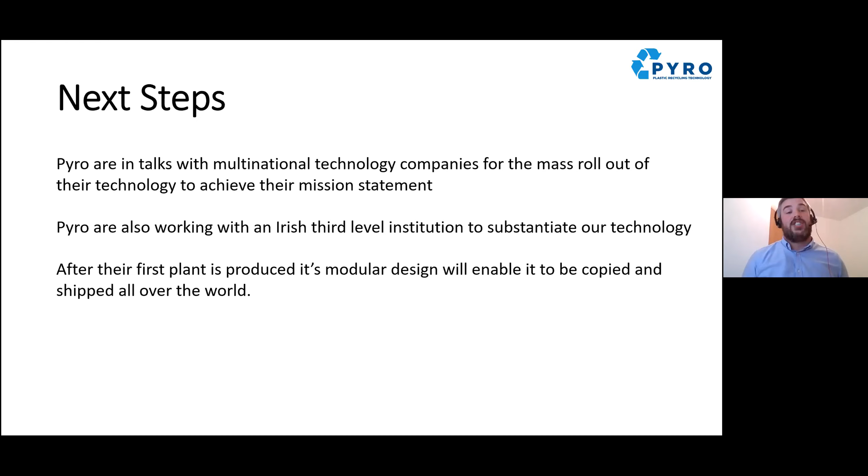I will leave you with an old Greek proverb. A society grows great when all men plant trees whose shade they know they shall never sit in. What does that say for our society, who discard 350 million tons of waste plastic every year, leaving it for the next 16 generations to deal with?